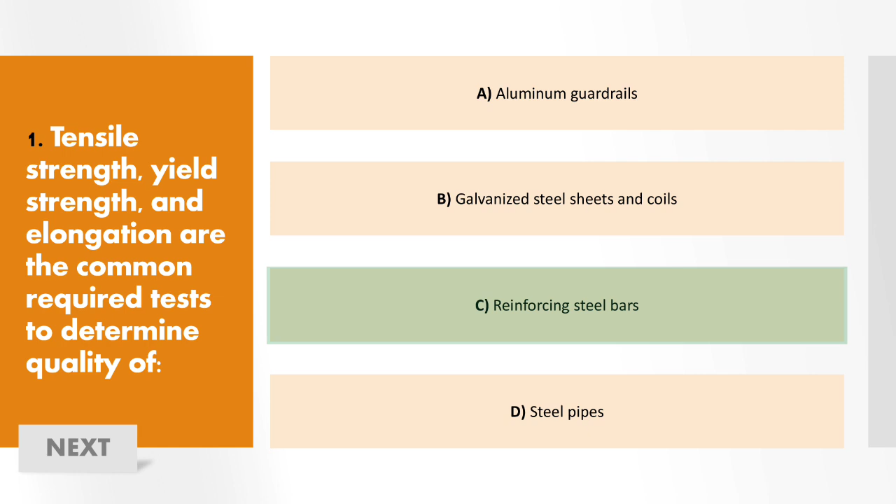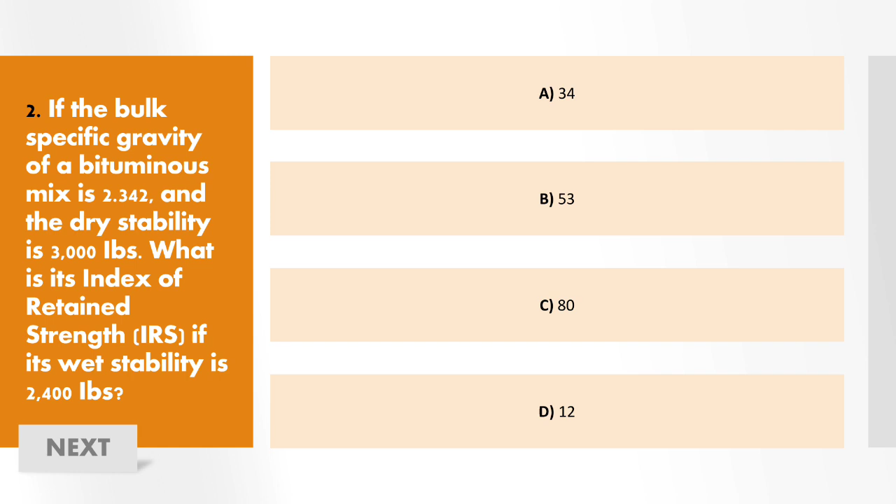Next, for number 2, we are required to find the index of retained strength or IRS. Para makuha natin ang IRS, meron po tayong formula na IRS equals wet stability over dry stability, multiply the quotient by 100. Gamit ang formula, makukuha natin ang sagot sa IRS which is 80%.

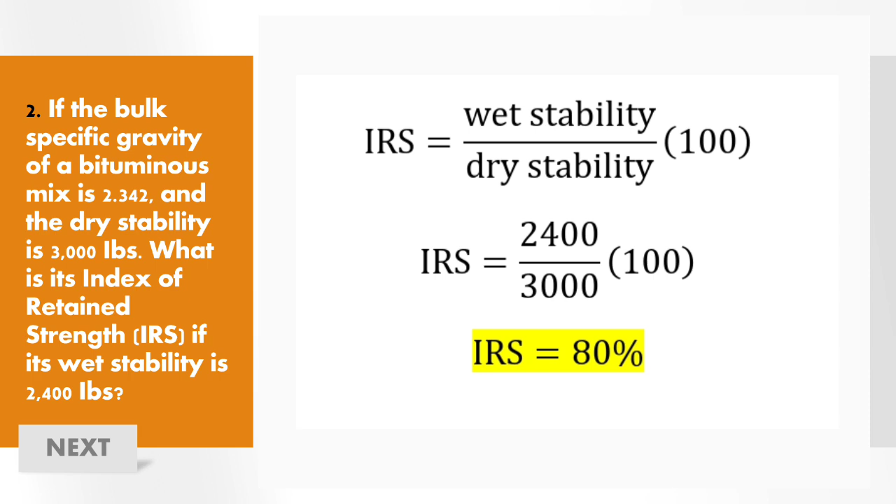For number 3, we are required to find the degree of compaction. Para makuha ang degree of compaction, meron din po tayong formula dito. By substituting the given values, we get the answer 90%.

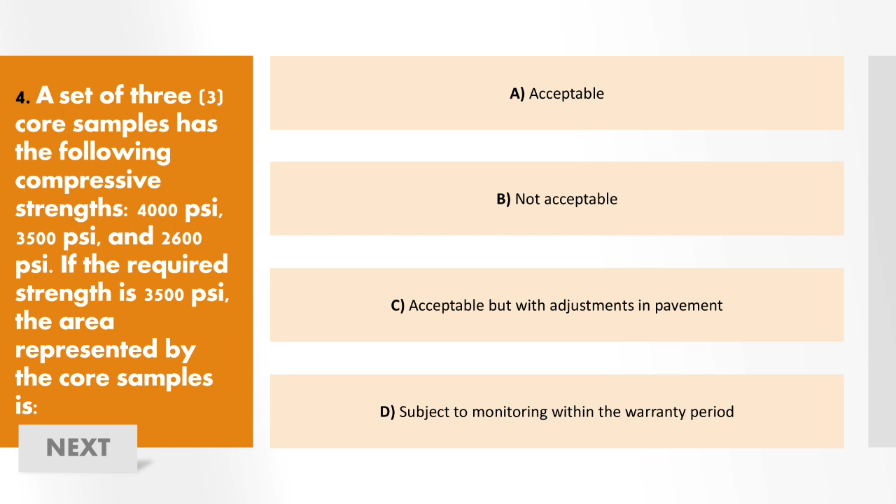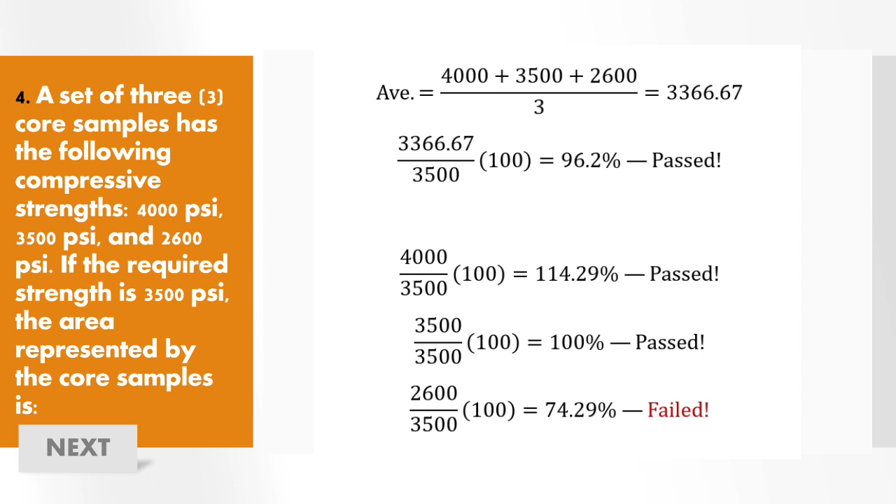Next, we need to determine if the area represented by the core samples is acceptable or not. To answer this problem, we need to check kung ang average strength ng core samples is at least 85% of the required. And also, each one of the core samples must be at least 75% of the required strength. Upon checking, we can see that the average strength of the 3 samples meet the 85% requirement. However, for individual checking, one of them did not meet the 75% requirement. In this case, the area represented by the core samples is not acceptable.

For number 5, the answer is letter A. Sampling shall be done by taking samples from the bottom, middle, and top of the stockpile. Number 6, since none of the 3 choices are methods of soil sampling, the answer is letter D.

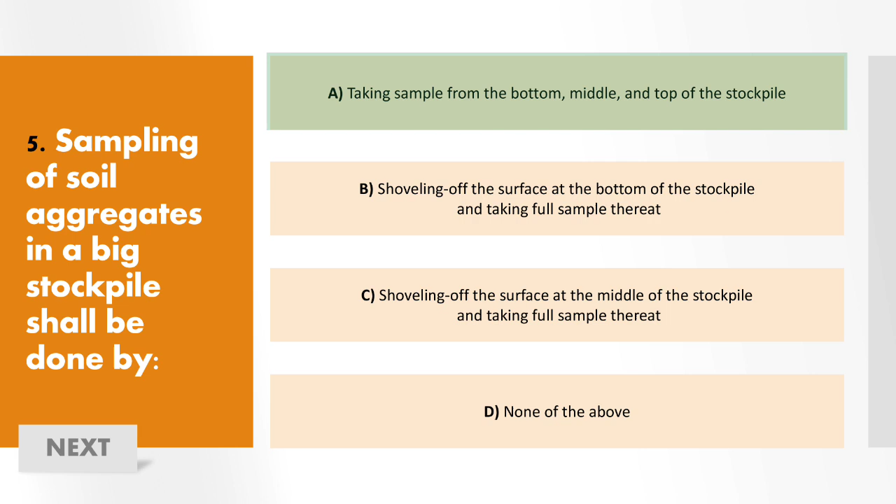For number 7, when the material failed to meet the grading requirement, it is best to reprocess the grading by blending with other sizes of aggregates. Therefore, the answer is letter D.

Number 8, the answer is letter A. The purpose of driving test piles is to determine the required pile length.

For number 9, all the mentioned factors in the choices affect the concrete strength. Therefore, the answer is letter D.

For number 10, the mixture shall be placed at a temperature not less than 107 degrees Celsius. Since the mixture is 15 degrees centigrade lower than the required temperature, we must reject the delivered materials.

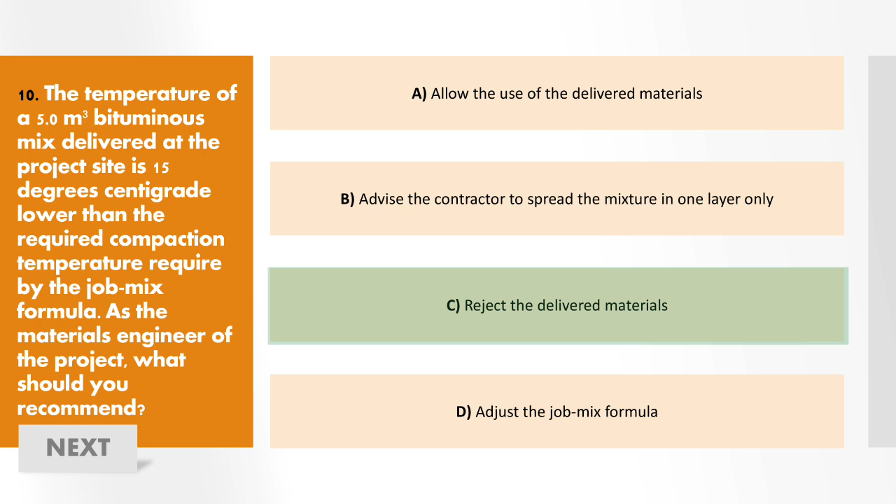Number 11, the answer is letter A. The practice is improper because this procedure provides that the test should be carried out to failure.

Number 12, the answer is B. The rebound hammer test cannot be used as a substitute to direct methods of compressive strength determination such as tests on core samples. For number 13, it is advised that if the slump exceeds 1.5 inches from what was ordered, we must reject it.

So the answer is letter C. Number 14, the answer is letter C. The minimum compaction requirement for an embankment is 95%.

Number 15, the answer is letter C, because petrographic test is used to determine the chemical characteristics of concrete, not to measure its hardness. Number 16, the answer is letter B.

The dry density will go higher because air is forced out of the soil. Number 17, the answer is letter C.

It is called Portland cement because it resembled cement obtained by grinding natural rocks found on the Isles of Portland. Number 18, the answer is B.

The purpose of capping concrete cylinders prior to testing for compression is to provide smooth flat ends that are perpendicular to the axis of the sample.

For number 19, again by using the formula for compaction, we get 98%. For number 20, the class of concrete used for bedding and after each layer of stone and rubble concrete shall be class B. So the answer is letter B.

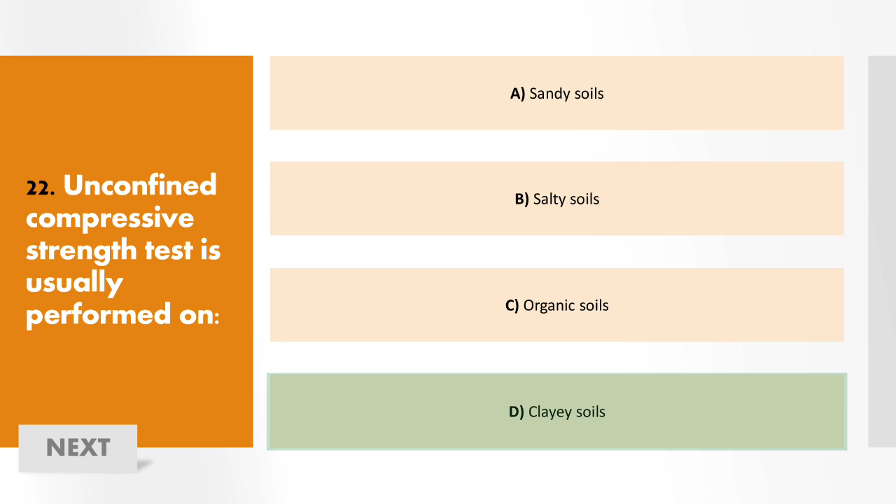Number 22, the answer is D. Unconfined compressive strength test is usually performed on clayey soils.

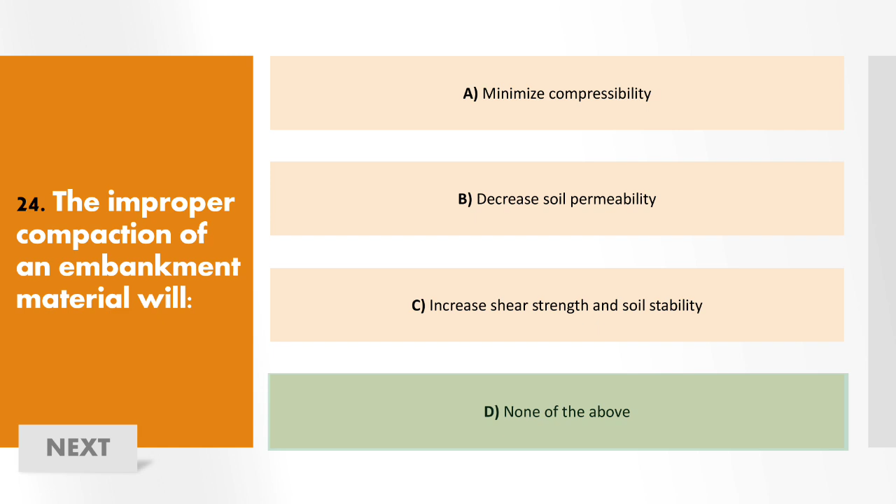Number 24, the answer is D, none of the above, because the three given options are only achievable through proper compaction.

Number 28, the answer is B. The minimum test requirement for riprap boulders are stone size or weight test and inspection report on assessment of stone soundness.

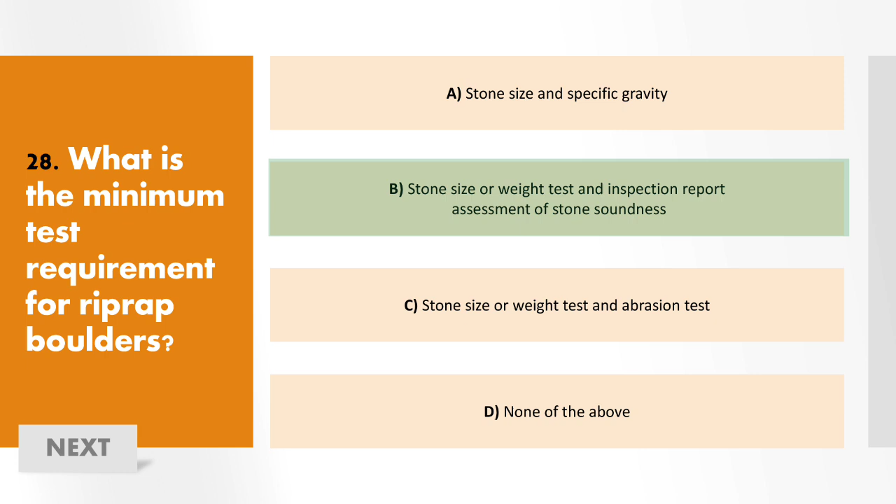29, the answer is B. Consolidation test is usually performed on undisturbed samples. This is to determine the settlements due to primary consolidation of soil by conducting one-dimensional tests.

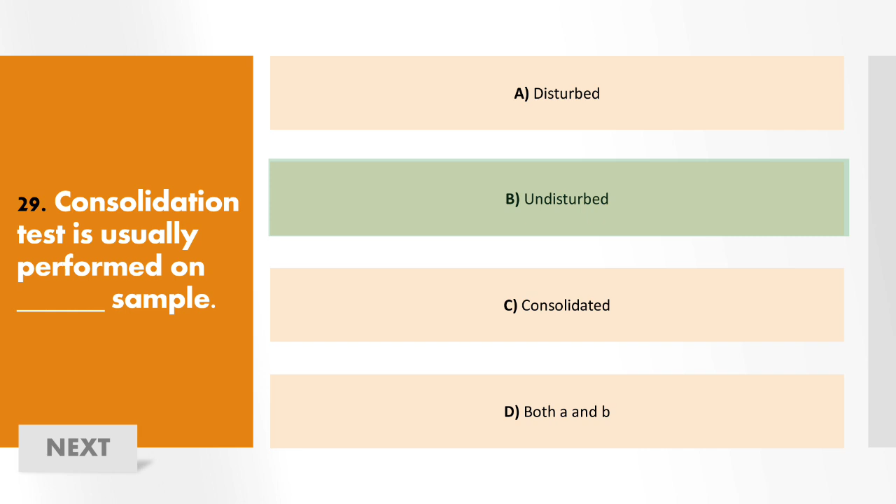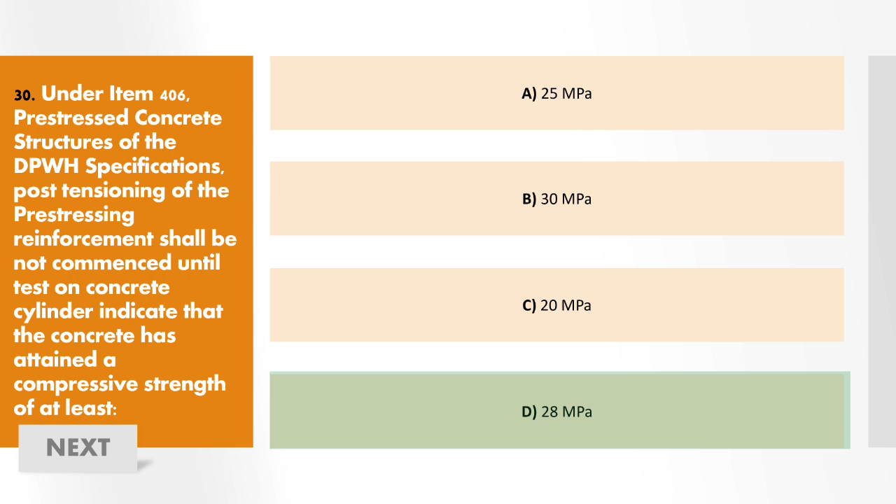30, the answer is D. Post-tensioning of the pre-stressing reinforcement shall not be commenced until tests on concrete cylinder indicate that the concrete has attained the compressive strength of at least 28 megapascal.

For number 34, ASTM C42 states that submerge the test specimens in lime-saturated water for at least 40 hours immediately prior to making the compression test. So the answer is C.

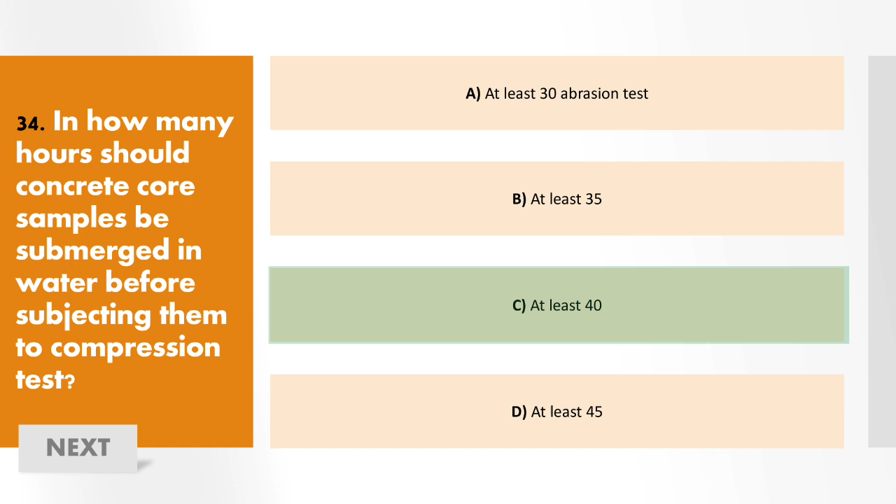For number 35, since we have a force which is 92,000 pounds and a diameter of 6 inches, to find the compressive strength, we can use the formula for normal stress and get the answer 3,254 psi.

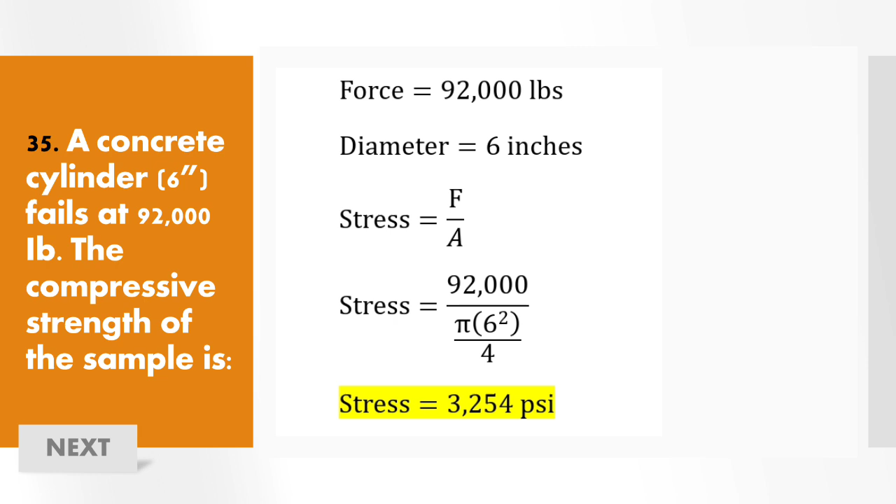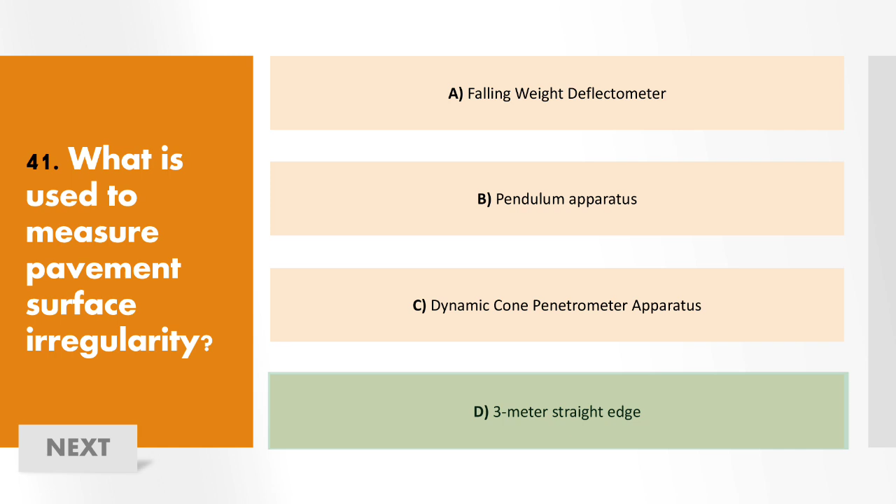The equipment to measure pavement surface irregularity is 3-meter straight edge, or nowadays called the International Roughness Index machine.

For number 42, before concrete paving, the base of a roadway should be kept in moist condition and saturated with water for at least 2 hours. So the answer is A.

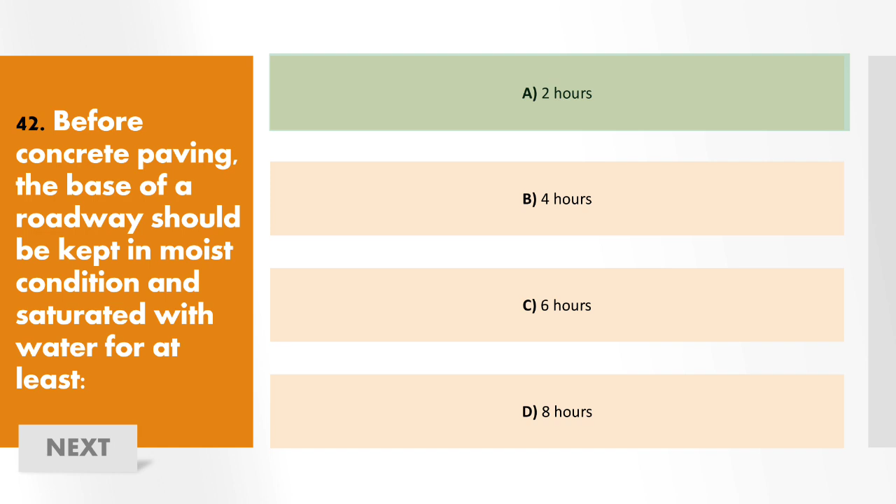Number 43, the answer is C. Grass cover is the only choice we cannot use as a slope protection because it doesn't penetrate well to deeper soil nor protect the slope it stands.

44, the answer is C, because consolidation test requires undisturbed samples.

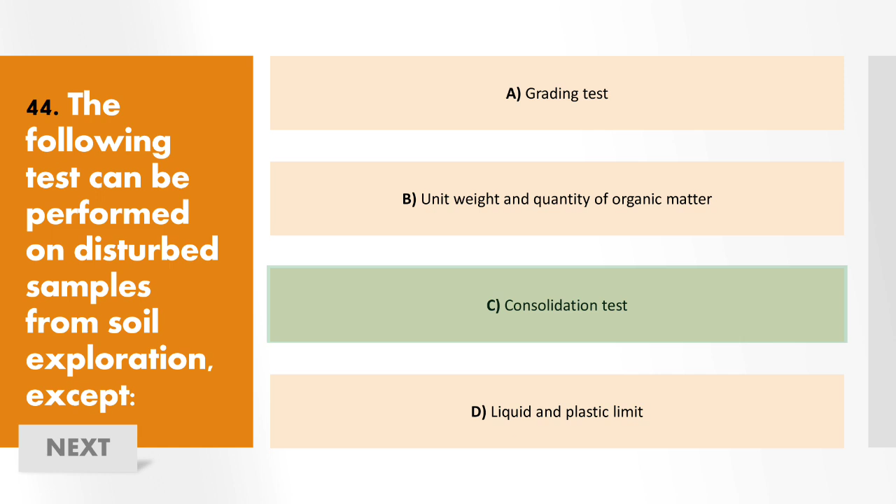For number 45, the answer is B. The workability of the mix depends on its temperature. The hotter the mix, the more workable it is.

46, the answer is B. The temperature of the mix shall have an allowable of plus or minus 10 degrees Celsius.

For number 47, the answer is A. The rate of loading that must be observed when testing the concrete cylinder specimen is 20 to 50 psi per second. For number 48, the answer is B.

The reduction of 1/3 or 33% is expected when the surface is not properly finished and that the load is not uniform.

Number 49, the answer is C. The computed compressive strength will be higher, and since it is higher than the actual strength, it is less accurate.

For number 50, the answer is B. LGU is not authorized to test the materials to be incorporated in DPWH projects. One of the main reasons is that LGU lacks materials testing laboratory.

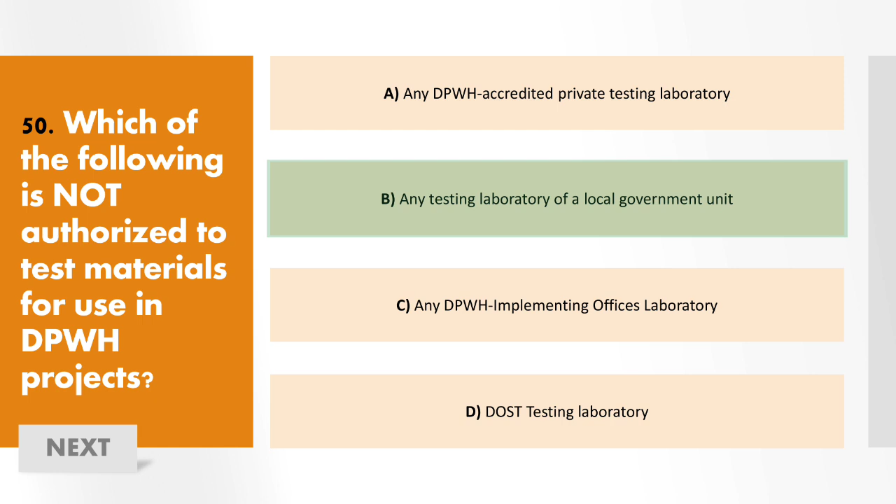Number 51. From the following data, determine the degree of compaction. Given field density test data: weight of material taken from the hole is 4.885 kg, weight of sand to fill the hole is 3.885 kg, volume of hole is 0.0028 cubic meter, wet unit weight is 1,745 kg per cubic meter.

Dry unit weight is equal to 1,663 kg per cubic meter. Laboratory data: maximum dry density is 2,250 kg per cubic meter, optimum moisture content is 8.10%.

To get the degree of compaction, it is equal to dry unit weight over maximum dry density. So 1,663 over 2,250 times 100 is equal to 74%, or letter E, 74.

Number 52. ASTM C150 requires that the 28-day strength of mortar from type 1 Portland cement be at least 27.6 megapascal. Three specimens were tested, two passed but one failed by more than 20%. What will be the conclusion?

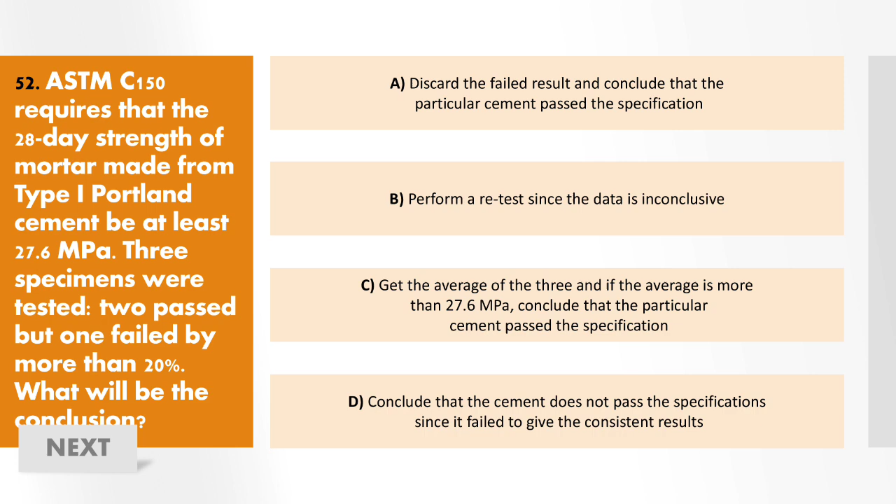Number 53. A slurry system for road surface treatment of item 304A is a type of cold asphalt, letter A. It is used as the best alternative to hot asphalt. Hot asphalt is harder to source, while this one is readily available. It is used for sealing minor cracks and for adding thickness. So the answer is letter A, cold asphalt.

Number 55. Liquid limit is usually the Atterberg limits, a basic measure of the critical water contents of a fine-grained soil: shrinkage limit, plastic limit, and liquid limit. The boundary between each state can be defined based on change in the soil's behavior. Liquid limit is the moisture content expressed as a percentage of the weight of oven-dried soil at which soil changes from a plastic to a liquid state. So the answer is letter D, none of the above.

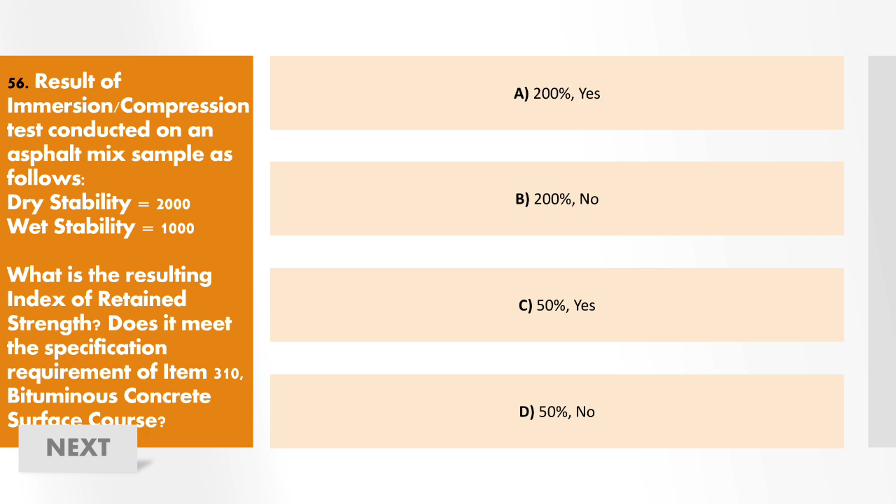Number 57. What test is conducted on the soil? A soil sample was subjected to the following procedures at the laboratory: compaction at its optimum moisture content, application of surcharge to represent the estimated thickness of pavement over the subgrade, soaking the sample for 4 days, and then forcing a plunger into the sample to a depth of 2.5 mm. This kind of test is called the California Bearing Ratio or CBR test.

This test is a penetration test meant for the evaluation of subgrade strength of roads and pavements. The results obtained by this test are used with empirical curves to determine the thickness of pavement and its component layers. So the answer is letter D, CBR test.

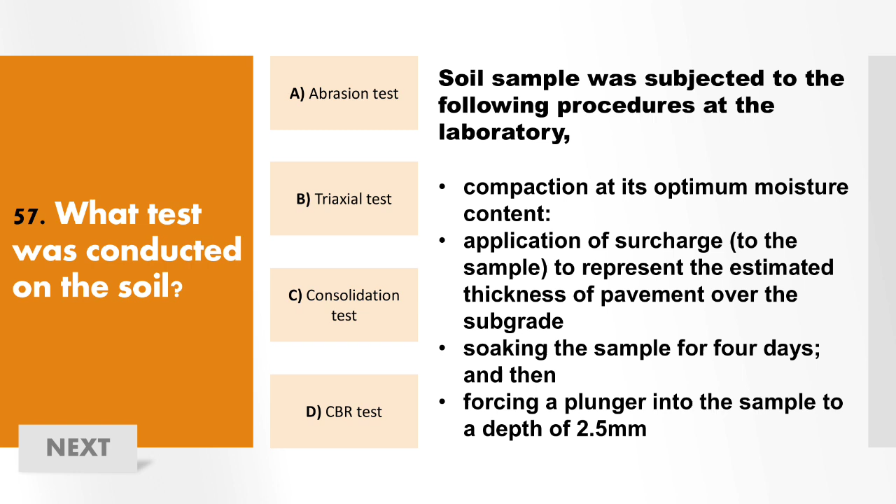Number 59. Who should take samples of materials and bring them to the laboratory for testing? So the answer is letter C, both DPWH and contractor's engineer.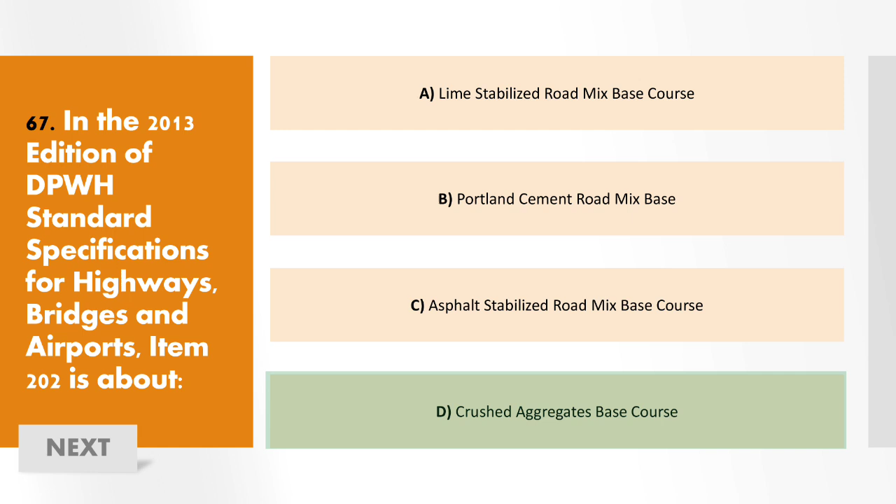Number 70. The approval of preliminary samples from the same source should... When you have preliminary samples, commonly called approved sample source, if your materials are approved or pass testing, and they came from certain sources, those sources are called preliminary samples. But this doesn't mean that all materials from those sources are guaranteed, because not all materials from the same location have the same characteristics. There can be differences, and some materials from there could be substandard, so it's important to still test the materials even if they came from preliminary samples. So the answer is letter B, not to be considered a guarantee of acceptance of all materials from the source.

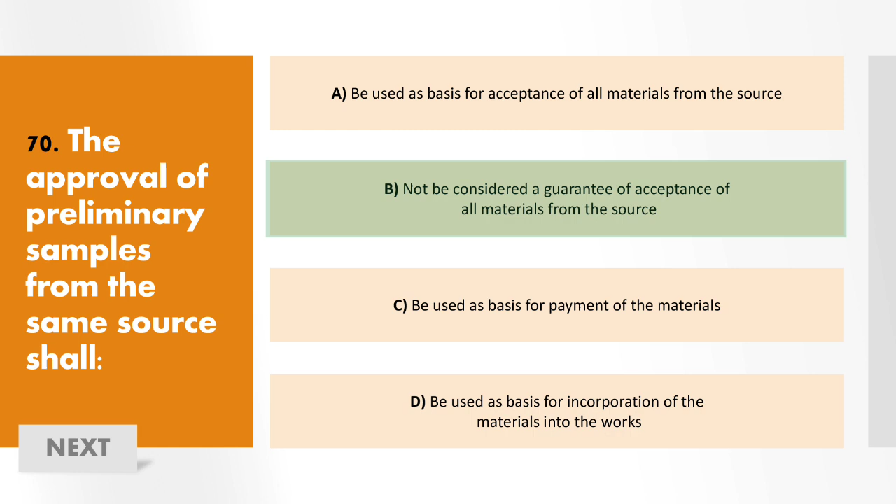Number 71. The minimum testing requirement for one quality test of concrete hollow blocks is letter B, 6 units for every 10,000 units. The answer is letter B.

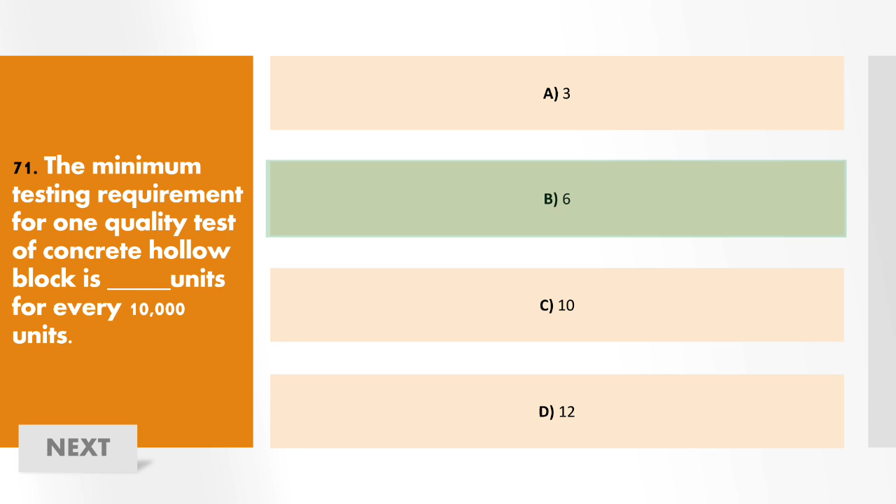Number 73. Materials suitable for embankment should have a plasticity index of not more than... There are two types of embankment stated in DPWH Standard Specification Volume 2, Subsection 104.2, Materials Requirement: Suitable and Unsuitable Materials. It states that suitable material is acceptable in accordance with the contract and can be compacted in the manner specified in this item. It can be common material or rock, as determined by AASHTO T11. The material should have a plasticity index of not more than 6 as determined by AASHTO T90, and a liquid limit of not more than 30 as determined by AASHTO T89. So the answer is D, plastic index equal to 6.

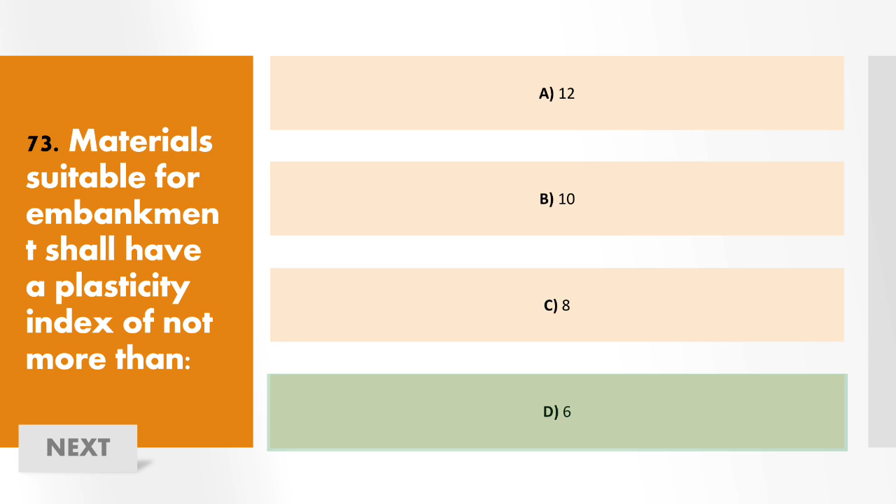Number 76. What penetration grade of asphaltic material is appropriate for sealing of PCCP joints?

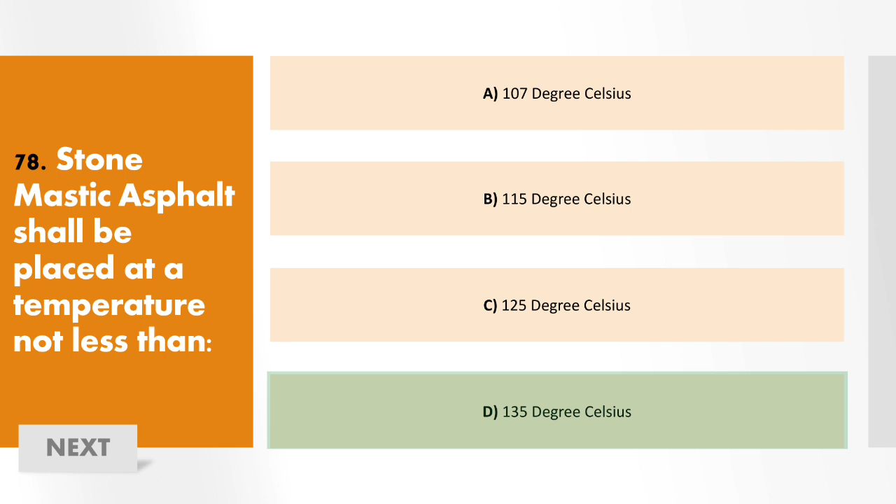Number 79. Given mass of asphalt specimen in air is equal to 1,200. Mass of asphalt specimen in water is equal to 700. Mass of asphalt cement in SSD is equal to 1,203. Calculate the bulk specific gravity of the asphalt specimen. The formula for specific gravity is dry specimen in air over mass of asphalt cement in SSD minus mass of water. So it is equal to 1,200 over the quantity 1,203 minus 700, which is equal to 2.386. So the answer is 2.386, letter D.

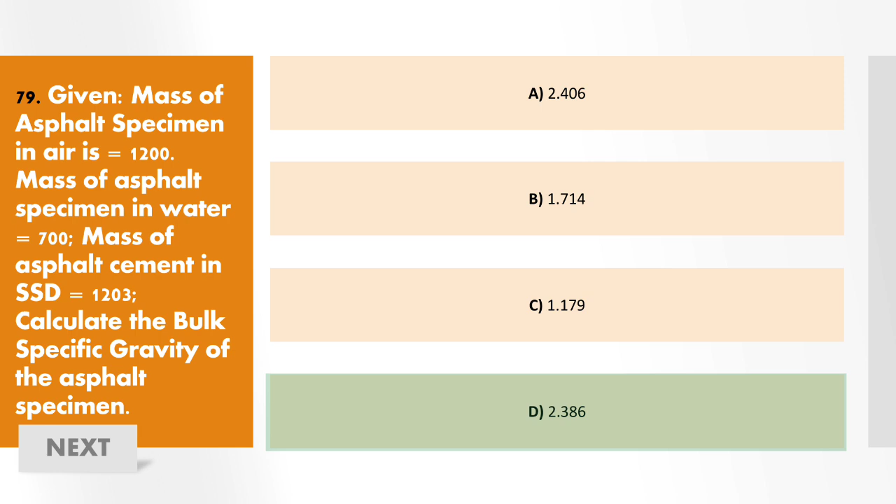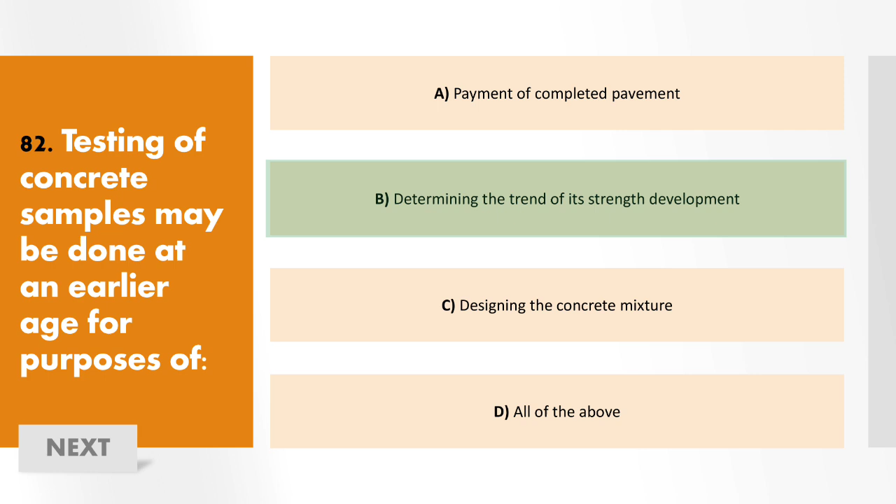Number 82. Testing of concrete samples may be done at earlier age for the purpose of determining the trend of its strength development. So the answer is letter B.

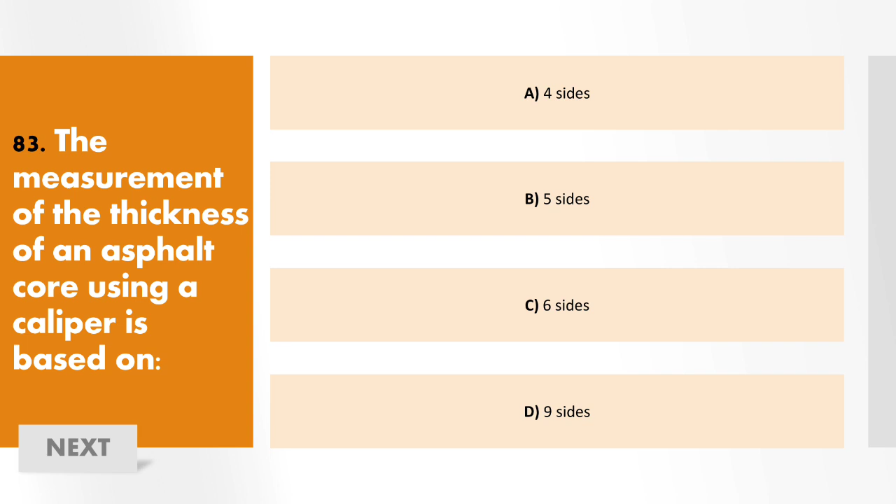Number 84. The maximum percentage abrasion loss allowed for paving concrete coarse aggregate is 40%. Item 311.2.3, Coarse Aggregates, states that it should have a mass percent of wear not exceeding 40 when tested by AASHTO T96. So the answer is letter B, 40%.

Number 85. Permit for the procurement of chemicals used for various laboratory testing can be secured from PDEA. This is in accordance with RA 9165, commonly called the Comprehensive Dangerous Drugs Act of 2002. So the answer is letter D, PDEA.

Number 86. What test determines the resistance to deformation of a compacted asphalt concrete mix? The answer is letter B, Marshall Stability Test, which determines the resistance to deformation of a compacted asphalt concrete mix. Marshall stability and flow are asphalt mixture characteristics determined from tests of compacted specimens of a specified geometry. In this test, we follow the ASTM D6927 standard test method for Marshall stability test. Aside from Marshall stability test, this is also the reference code for testing of flow value along with density. So the answer is letter B, Marshall stability test.

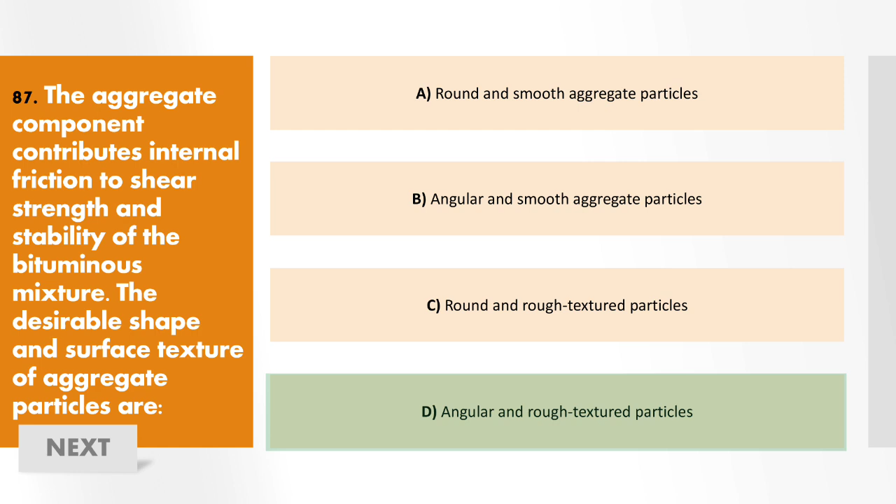The aggregate components contribute internal friction to shear strength and stability of the bituminous mixture. The desirable shape and surface texture of aggregate particles are angular and rough texture particles. Round aggregate particles are smooth textured, so they may have become round due to their smooth texture. Angular and rough texture particles are better used in concrete because they provide workability to concrete and contribute friction to shear strength and stability of the bituminous mixture. So the answer is letter D, angular and rough texture particles.

Number 88: In hot climate under sustained loading, asphalt cement behaves like. In hot conditions such as desert, under sustained loads, asphalt cement acts like viscous liquids. Viscous liquids like hot asphalt are sometimes called plastic because they start flowing and do not return to their original position. On the other hand, in cold climates such as winter, or under other rapidly applied loads like fast-moving trucks, asphalt behaves like an elastic solid. Elastic solids are like rubber bands: when loaded, they deform, and when unloaded, they return to their original shape. So the answer is B, viscous liquids.

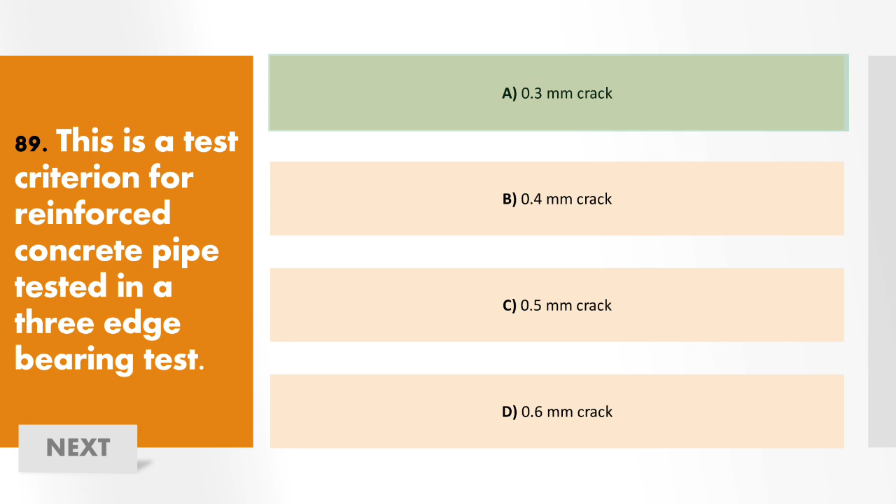Number 89: This is a test criterion for reinforced concrete pipe tested in three-edge bearing test. It is 0.3 mm crack. Based on numerous studies developed load strain and load deflection information during three-edge bearing test of a representative pipe section up to the deformation of both hairline and 0.01 inch cracks. So the answer is letter A, 0.3 mm crack.

Number 90: Concrete curing refers to the maintaining of an adequate moisture content and temperature in concrete at early ages so that it can develop the properties the mixture was designed to achieve. Curing begins immediately after placement and finishing so that the concrete may develop to the desired strength and durability. This procedure is done to promote cement hydration, making the concrete develop strength, volume stability, resistance to freezing and thawing, and abrasion and scaling. So the answer is letter B, procedure done to promote cement hydration.

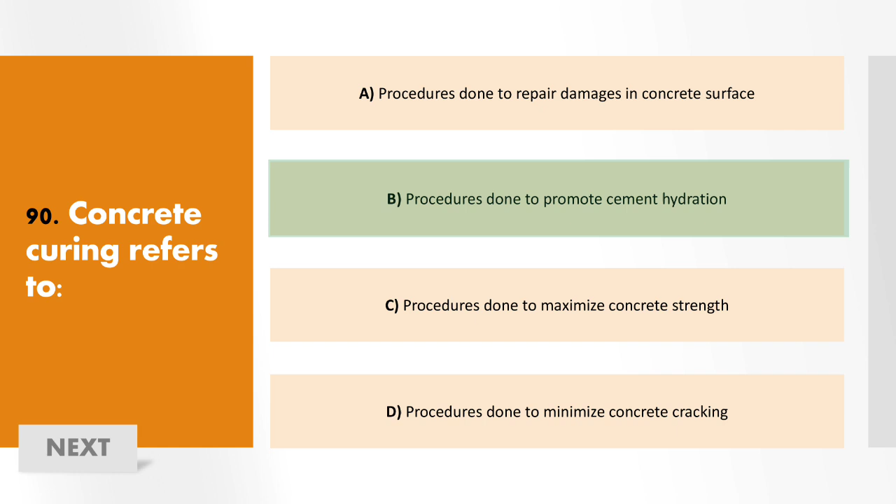Number 92: As construction work progresses, you notice that the materials delivered at the project site are different from the ones tested and that passed the requirements. As a materials engineer, what would you do? This is a very practical way of practicing decision-making as a true materials engineer. It is common knowledge that a material that has not been tested, or is not part of the tested group of materials in the program of works, should not be incorporated in the construction works. Thus, the delivered material should not be used unless tested. Based on the given choices, it seems correct to conduct immediate retesting, but that would consume more time. Replacing the materials with tested ones seems better, but if we replace it with another untested one, it results the same. Therefore, it is best to reject the delivered untested materials and use the tested ones instead. So the answer is C, reject the materials.

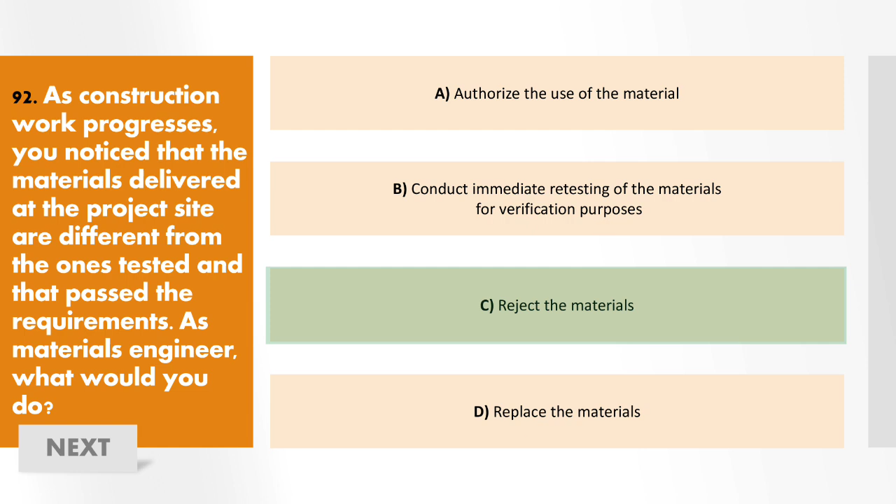Number 93: The pH value of water suitable for concrete construction should generally be between. On the pH scale, which runs from 0 (very acidic) to 14 (very alkaline), cement is incredibly alkaline with a pH of 12 to 13. Consider water with a pH of 7, which is considered pH neutral. Human skin is slightly acidic at pH 4.5, which is why Portland cement is dangerous to skin, having a basic pH of about 13. The pH value at the exposed surface soon falls as reaction occurs between carbon dioxide from the atmosphere and alkalis in the concrete, a process known as carbonation. Over time, fronts of carbonated concrete with pH values of about 8.5 advance below the exposed surface. So the answer is letter B, 6 to 8.

Number 94: Which is not a type of PCCP distress?

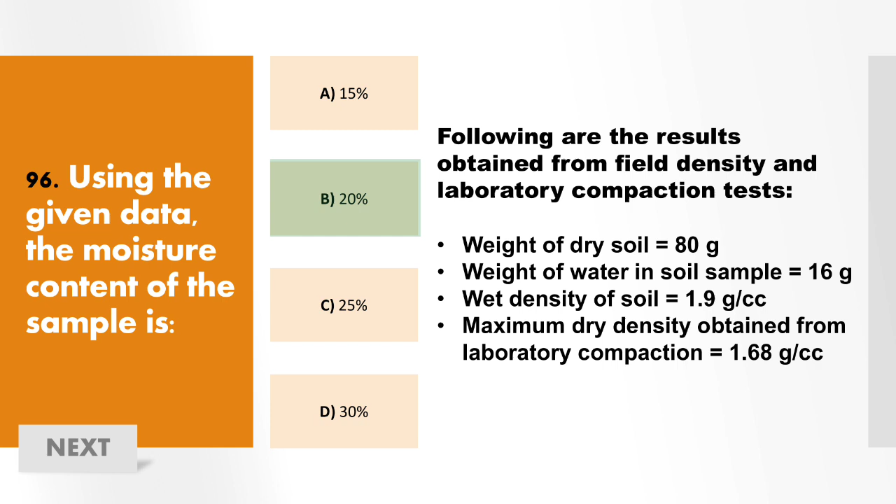Number 97. What is the function of emulsifier in liquid asphalts? Based on the given choices, it may seem all are correct, but an engineer should know that emulsifiers are molecules with water-loving or hydrophilic ends and oil-loving or hydrophobic ends. They make it possible for water and oil to become finely dispersed in each other, creating a stable, homogeneous, smooth emulsion. So the answer is letter D, to enable asphalt and water to mix.

Number 98. When the result of the second test differs from that of the first test on a sample representing the same lot of materials, a third test is done. This is referred to as... When the result of the second test differs from the first test on a sample representing the same lot of materials, the third test is done. This depends on what kind of material is being tested.

If a compressive test is being conducted for one set of three samples, the third test will be called a tertiary test. However, for other materials, such as testing of reinforcing steel bars or concrete core samples, once a second test is conducted, it is considered the comparison, and if it fails, a third test is needed to break the comparison and confirm the true result. By analyzing the acceptance test, the result of this test should be the basis of acceptance of the materials, which is called the retest or referee test. So the answer is letter C, referee test.